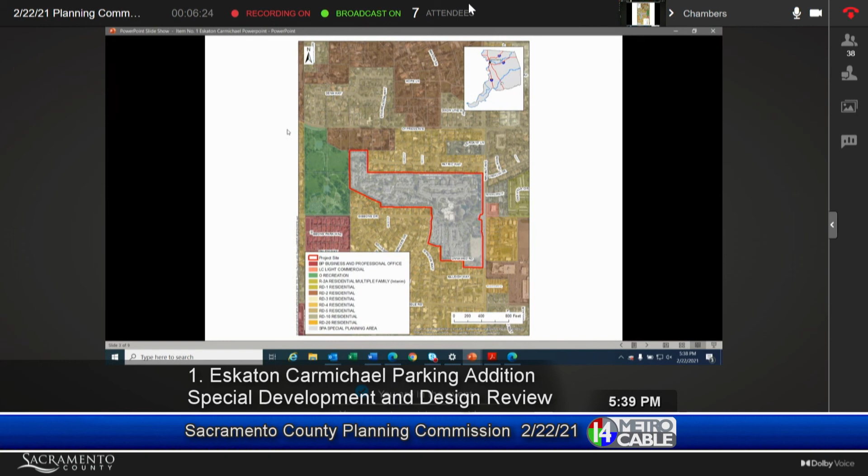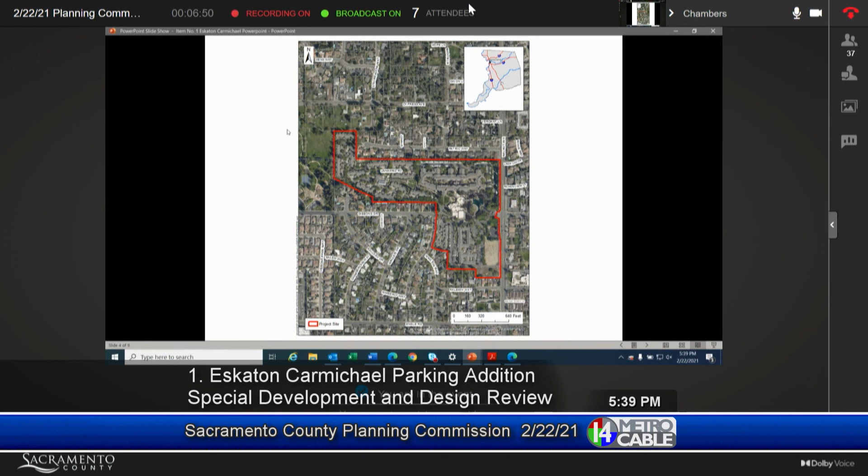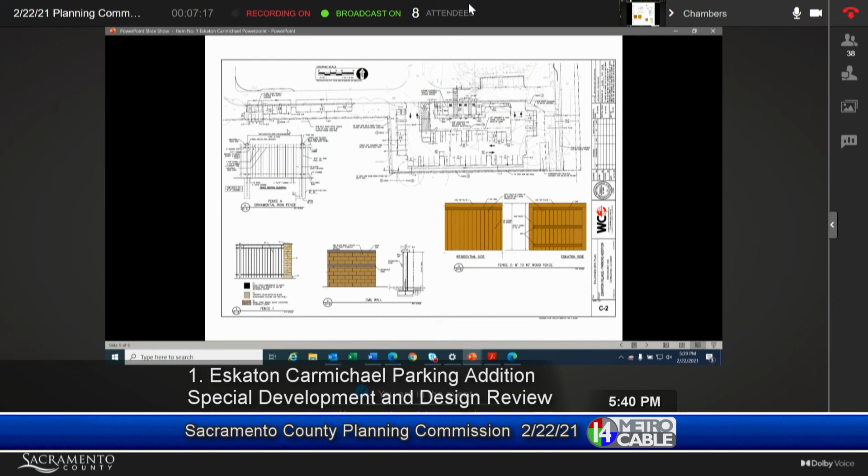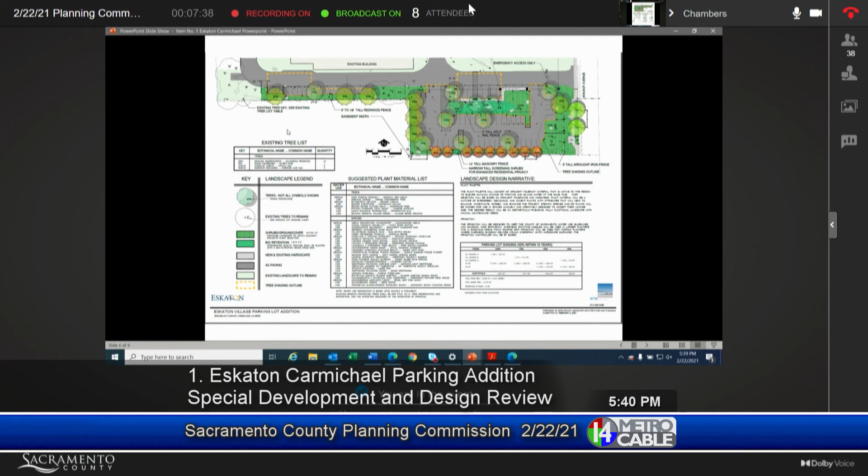This is the landscape plan that's illustrating the other requested deviation. The SPA requires a minimum of 25-foot landscape buffer between a residentially zoned property and a parking lot, and this project proposes a planter with a minimum width of 7 feet.

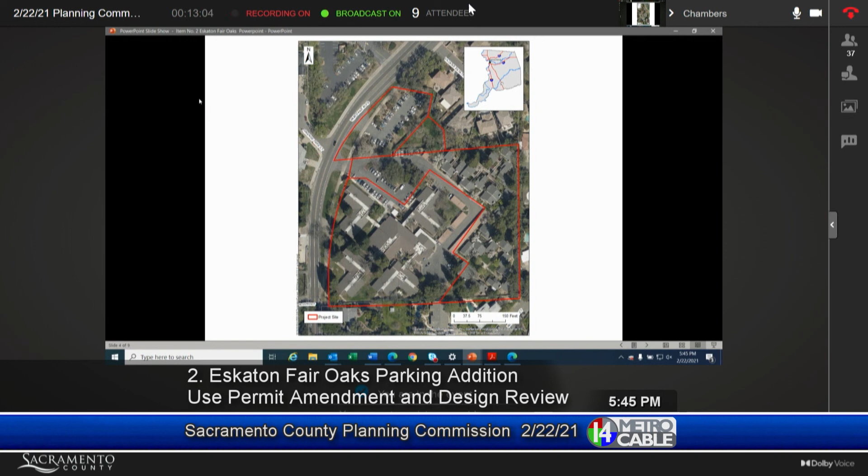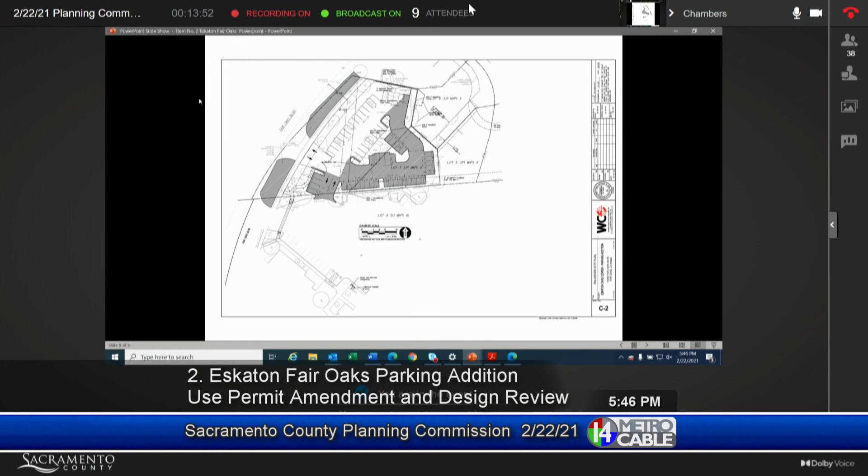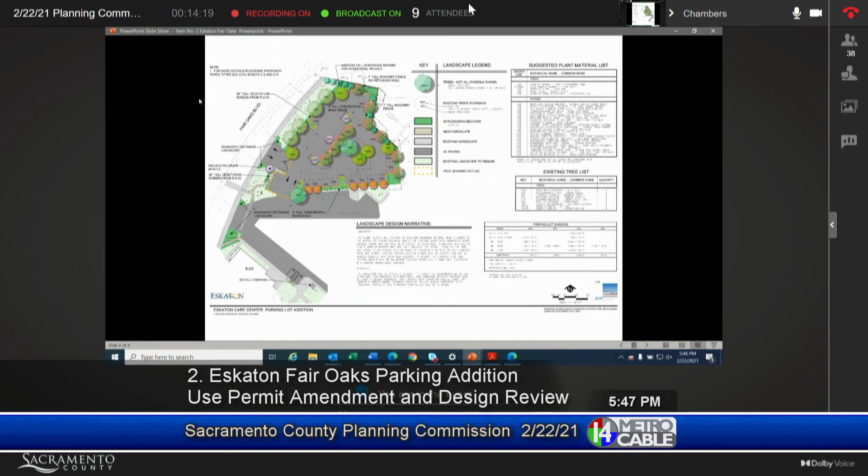Next slide, please. So two of the subject APNs are currently partially developed. One of them does have the parking lot for overflow parking for the Eskaton facility. The proposed expansion of the parking lot onto the vacant parcel would provide additional parking for the facility and would result in a net increase of 28 vehicle spaces and 2 motorcycle spaces. As mentioned, it improves circulation for pedestrians and cars. The property line bordering the residential properties to the east would be developed with a 7-foot masonry fence as well.

Next slide, please. The Fair Oaks CPAC met and reviewed this project on March 4th and recommended approval by a 3-to-1 vote. The DRAC met on February 27th of 2020 and determined that the site design is in substantial compliance with the countywide design guidelines, and staff is recommending approval of this project with conditions.

Next slide, please. As the final hearing body would be the board on this project, staff is recommending the following actions as recommendations to the board: determine that the environmental analysis is adequate and adopt the negative declaration, adopt the MMRP, approve the use permit amendment subject to findings and conditions, and find the project in substantial compliance with countywide design guidelines. That concludes my presentation, and I'm happy to take questions.

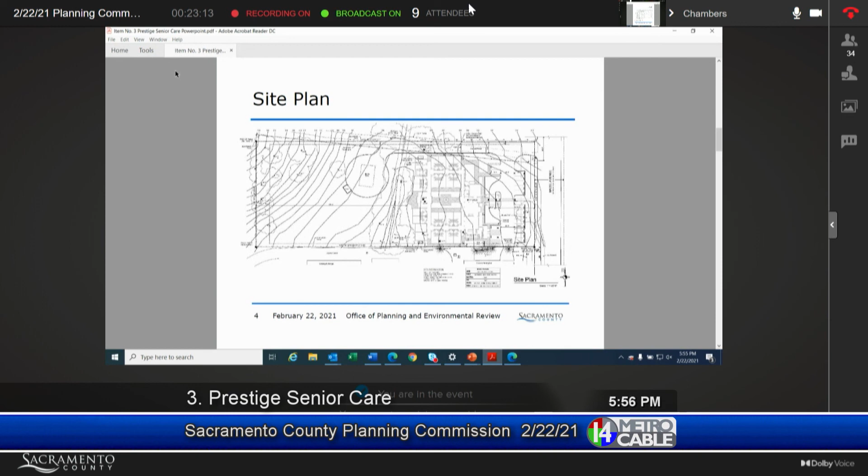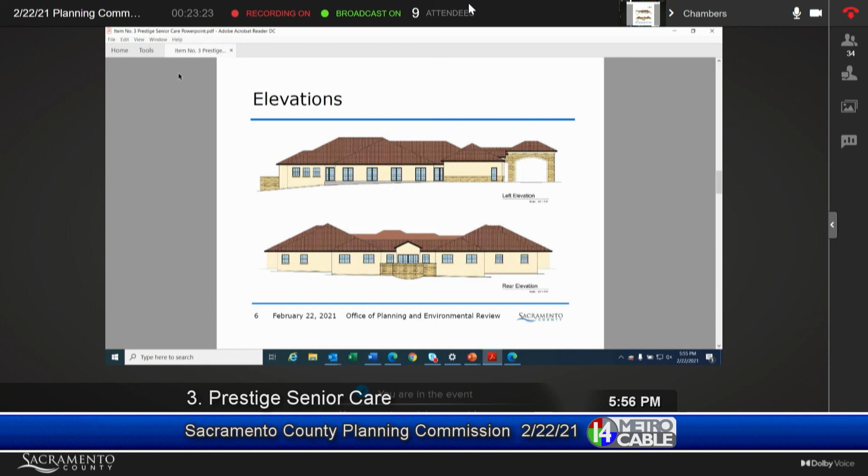Here is the landscape plan. The proposed parking area would contain 14 standard parking stalls, 2 Americans with Disabilities Act stalls, and a drop-off area that will be covered by a portico attached to the main entrance of the building. The parking lot would be set back from Hazel 10 feet, and there would be a detached sidewalk, which would also contain some landscaping.

The landscaping within the parking area is proposed to provide 53% shade coverage. The project will also be deviating from the 7-foot wide landscape planter requirement along the southern portion of the building. This is to accommodate the proposed drive access on the north side, as well as the proposed building. And a 6-foot tall solid fence will be provided along the south property line with a 6-foot tall masonry wall required along the portion shared with the parking lot.

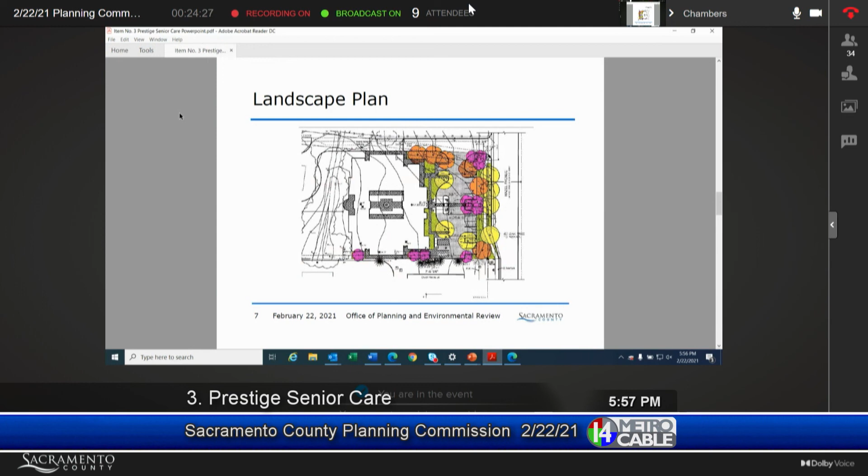Next slide, please. So as I stated, the proposal is a 15-bedroom resident congregate care facility with 5 staff bedrooms. Staff has included conditions of approval to ensure the facility does not exceed 15 residents. So the facility would be required to have a maximum of 15 bedrooms with only 1 resident within each bedroom.

As I stated, the 1 point of access to serve the development and the north adjacent neighbor, there is not currently a recorded easement for shared access. So if that was something that the applicant was going to pursue, which they are intending to pursue, we did include a condition to ensure that if that is the direction they want to go, that an easement is obtained and recorded for shared access prior to improvement plans.

The special development permit to deviate from the solid wood fence or the masonry wall and the landscape planter requirements, we did add some conditions of approval to ensure the appropriate fencing and the landscaping is installed. And the final hearing authority is the Planning Commission with the Board of Supervisors as the appeal body for this project. Next slide, please.

The project did undergo environmental review, so an initial study and mitigated negative declaration was prepared, as well as a mitigation monitoring and reporting plan. It was released for public review on December 8th of 2020. Impacts discussed included transportation and traffic, air quality, hydrology and water quality, biological resources, cultural resources, and greenhouse gas emissions.

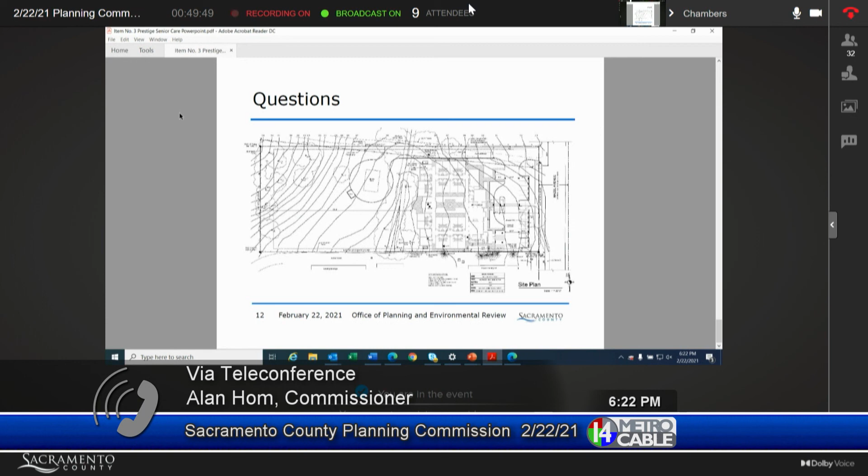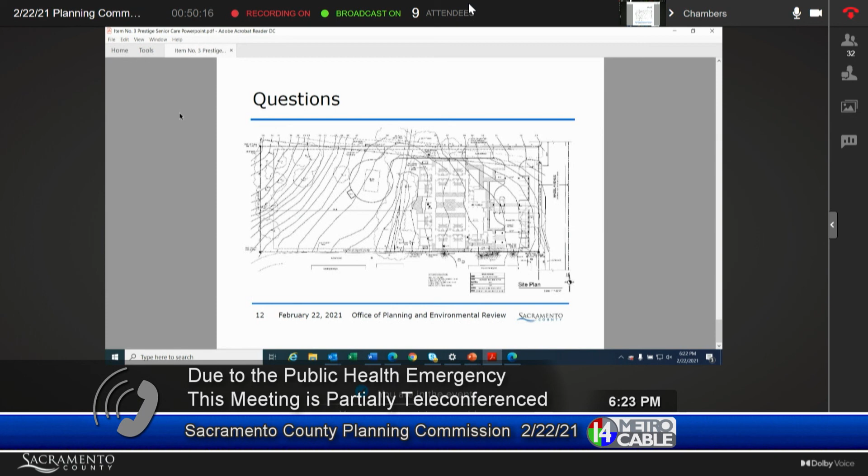Chair Shelby, this is Alan. My comment is I appreciate and take to heart all the neighbors' comments about the rural nature of the community and maintaining that sense of environment. But if there is a place to locate a facility like this, in my opinion it consolidates it right next to an existing large, non-rural facility, the church next door. I suppose if this were located leapfrogged a little bit, I'd probably be more opposed to it. But at this point, being where it's located, and the fact that the applicant does have an agreement with the neighbor to the north, I'm inclined to support this project.

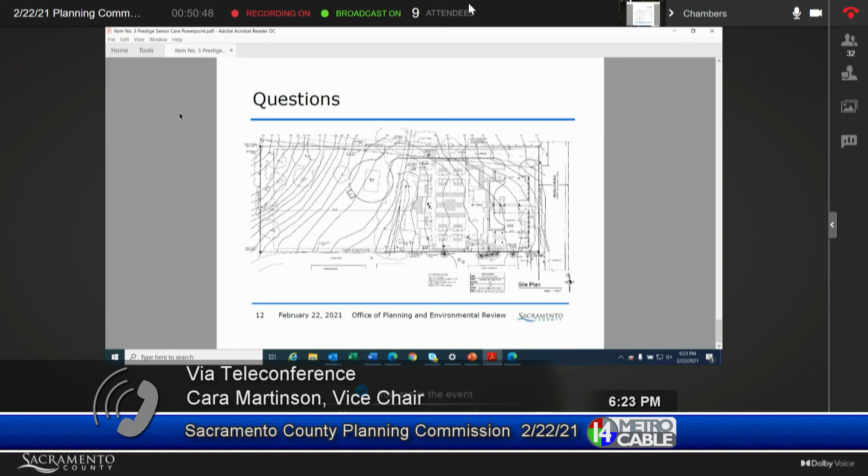Commissioner Martinson: I agree with my fellow commissioner. I think the findings can be made to issue the use permit and special development permit. I agree it's a unique type of property because it's residential, yet it's a larger facility, so I think the location is actually sort of the sweet spot in my opinion. I would be inclined to support the staff recommendation.

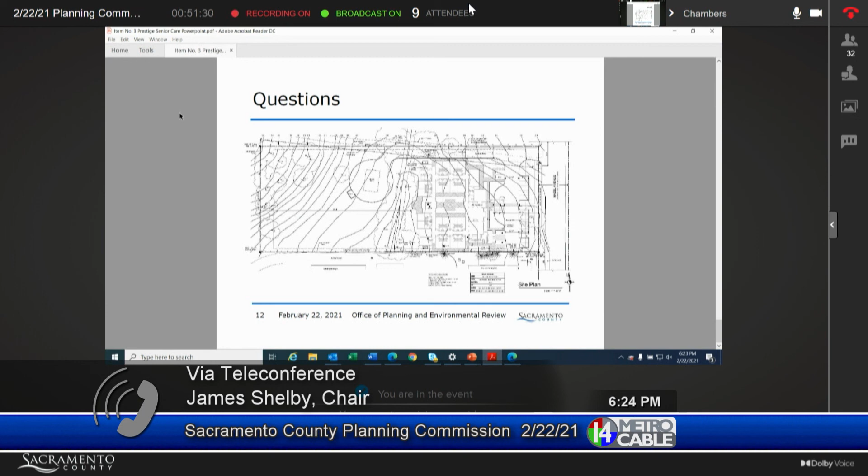I agree with the comments from Commissioner Hom and Commissioner Martinson. I don't hear any other comments. I'll move to accept staff recommendation. I'll second. Commissioner Hom, yes. Martinson, yes. Rathel, no. Tatishi, yes. And Chair Shelby, yes. The motion passes to move staff recommendations.

And item number 4 is the Planning Director's report. Good evening, Commissioners, this is Chris Bahuli, Principal Planner. I do not have a Planning Director's report for you this evening. We do have a number of items that you have heard that are going to the board in early and late March, but we will have another Planning Commission meeting before those items go, and I'll provide a more detailed report at your March Planning Commission meeting.

We always do items 4 and 5 together, almost. We have meetings coming up the next few cycles in March. We briefly touched on that at your last Planning Commission meeting when we did the housing presentation, that we have an affordable housing project coming up. That will be at your next meeting, and yes, we have items lining up for the next few meetings as well.